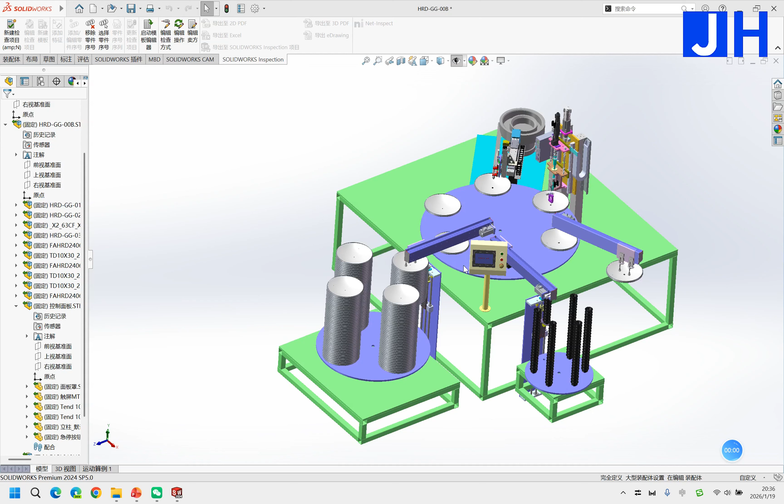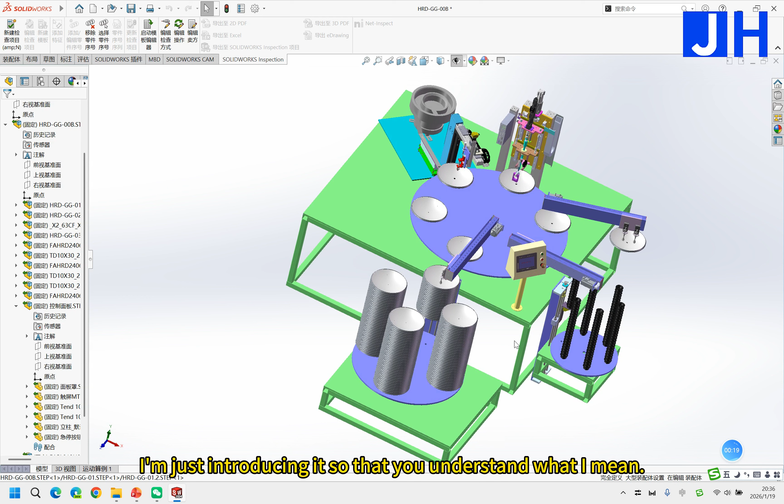This is a schematic diagram of a simple operation. I'll explain how it works in general and introduce the principles of assembly. This is not what the machine actually looks like, because it takes about a month to design a complete machine. I'm just introducing it so you understand what I mean. This machine has 5 working heads and 6 working platforms.

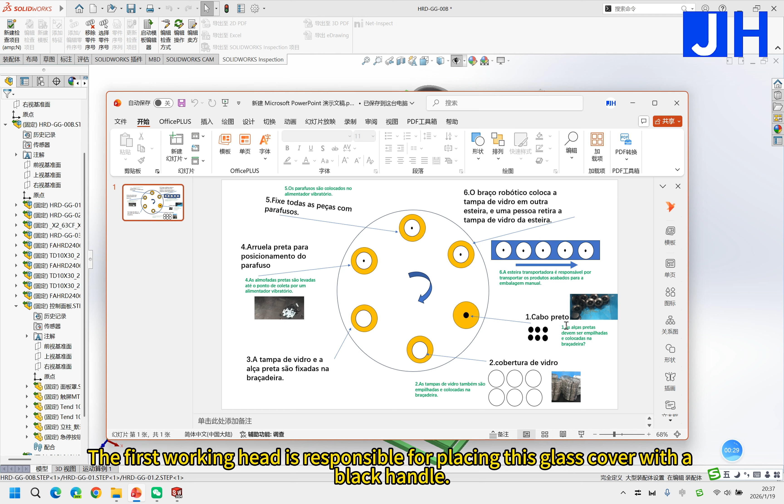The first working head is responsible for placing this glass cover with a black handle. This working head picks up the black handle from here and places it in the working platform fixture. There's a jig in this workbench.

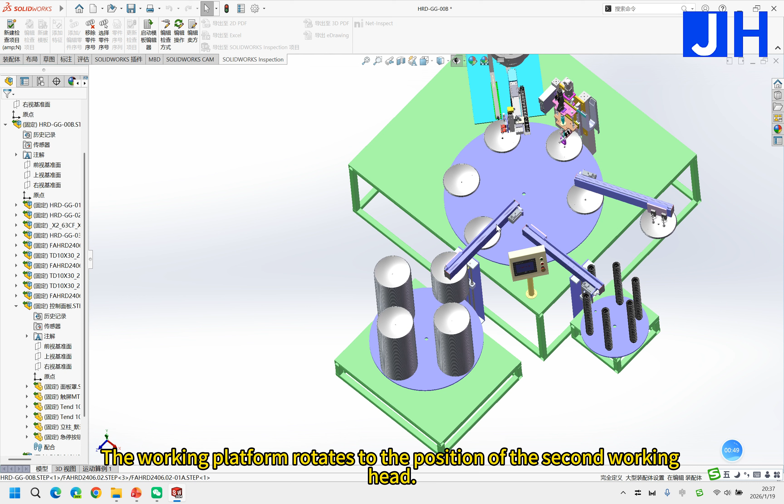After the parts are put away, this large rotating work platform rotates to the position of the second working head. The second working head is responsible for picking and placing the glass cover.

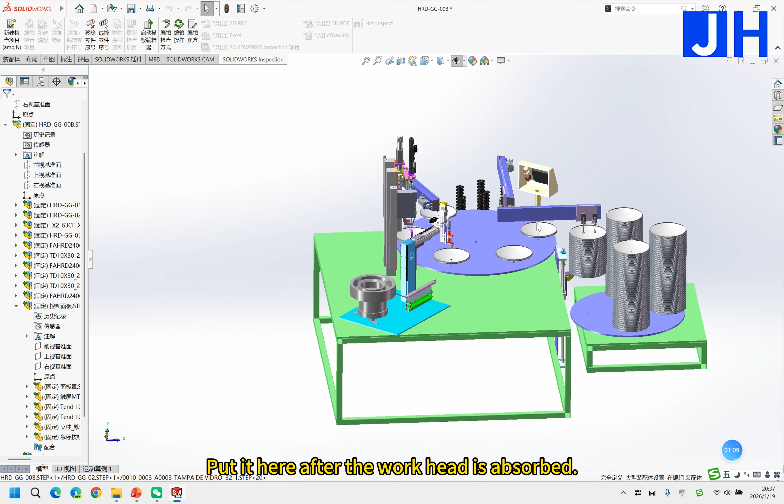It'll suck the glass cover from here, then place it in this work platform fixture, here, after the work head has absorbed it. Then the third workbench is responsible for centering, positioning the glass cover and handle to ensure the black handle and the glass cover are aligned in the same center position.

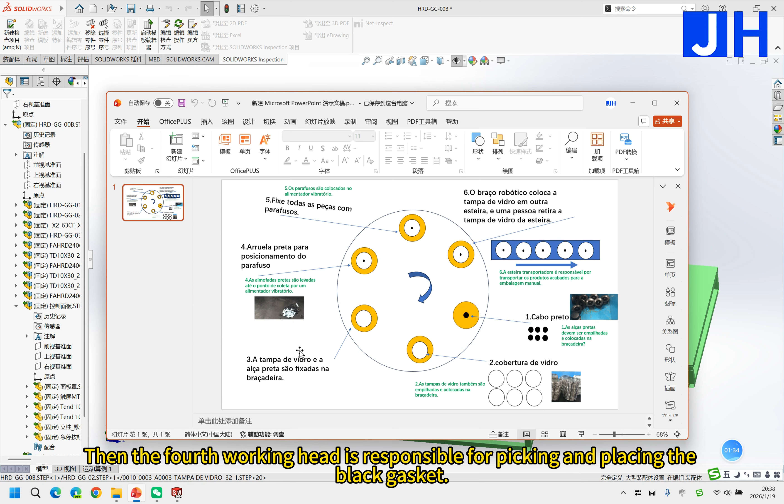Then the fourth working head is responsible for picking and placing the black gasket, holding the gasket in this screw. How does this black gasket automatically feed? This gasket is provided by this vibrating feeder.

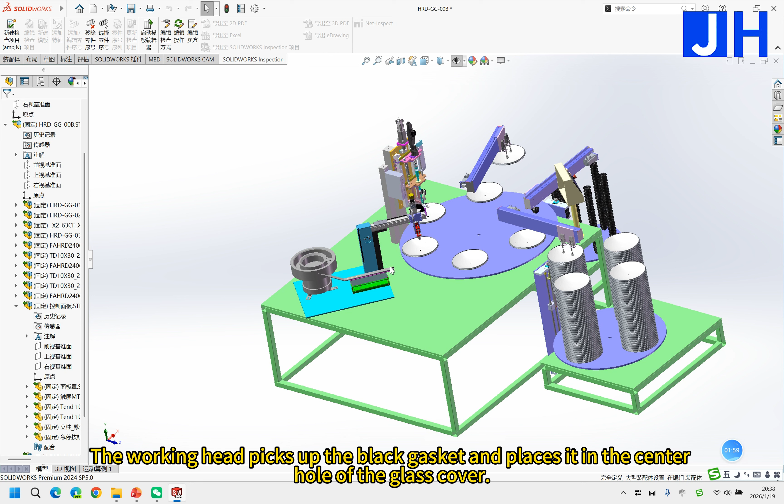The working head picks up the black gasket and places it in the center hole of the glass cover. Pick it up and place it in the center of this glass cover, from here to this position.

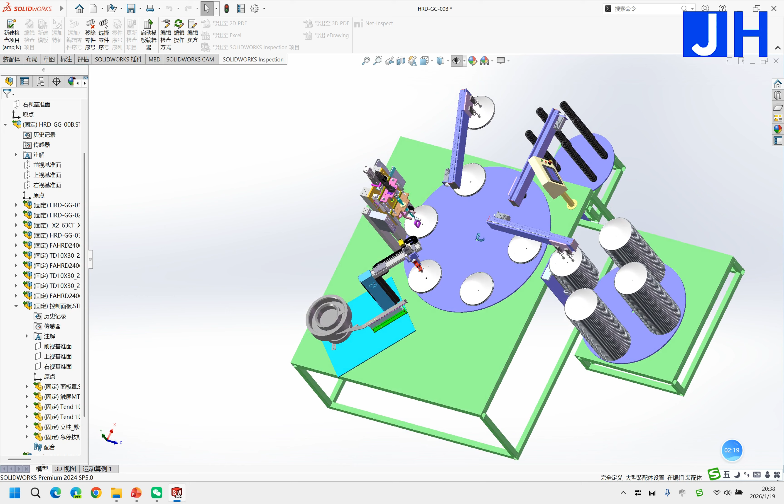After the gasket is placed, the circular working platform rotates to move under the fifth working head. This working head is responsible for assembling the screws, assembling and tightening them.

We are currently in the design phase, and we will design the machine according to your company's requirements to ensure it meets your needs. This number 5 working head is responsible for assembling this screw.

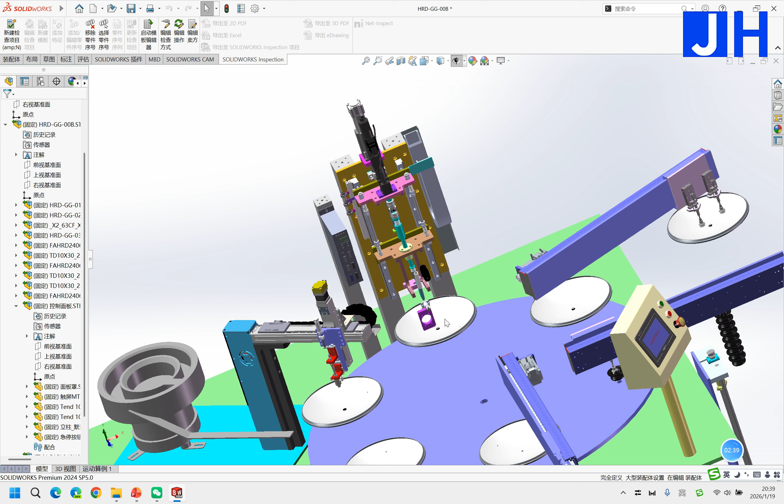After the screw is assembled, it moves under the 6th working head, which removes the finished glass cover from the fixture. The working head picks up the glass cover and places it above the automatic conveyor.

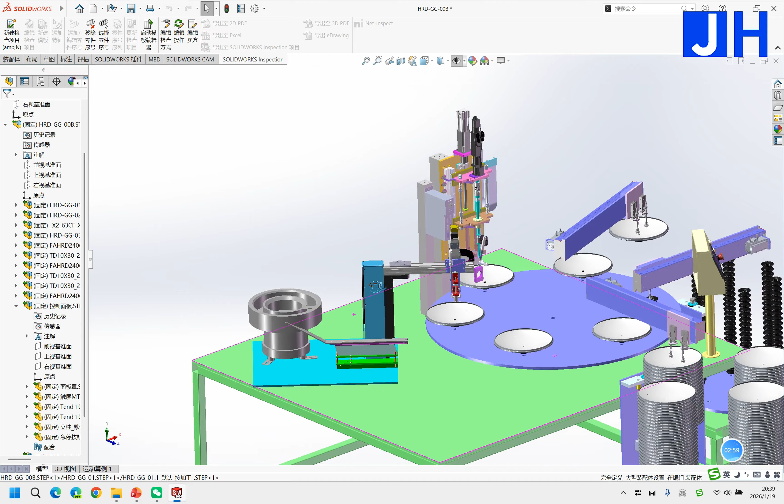Does your company have an automatic conveyor? If so, please move the conveyor to the side of the 6th work head. This is how the machine works.

This machine is fully automatic. The operator's job is simply to replenish the machine with various parts.

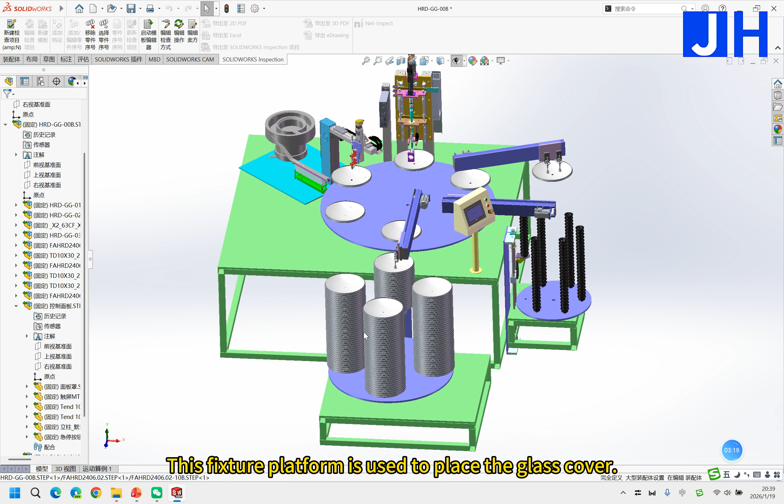This fixture platform is used to place the glass cover. After the number 2 working head picks up the glass, the platform below will automatically rotate the glass cover. Then the black handle here is the same, it will automatically rotate until there are enough handle parts.

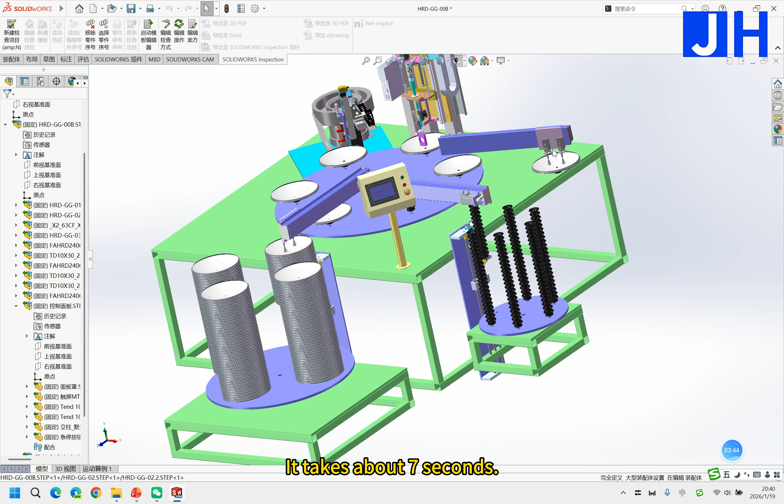We calculated this time: assembling a glass cover and producing the finished product takes about 7 seconds. Assembling 5,000 glass covers a day takes 10 hours. It takes about 7 seconds to get the finished product out, and there's no need for an operator to guard the machine. It's fully autonomous.

Let us know if your company has any requirements, and we will design it according to your company's requirements.